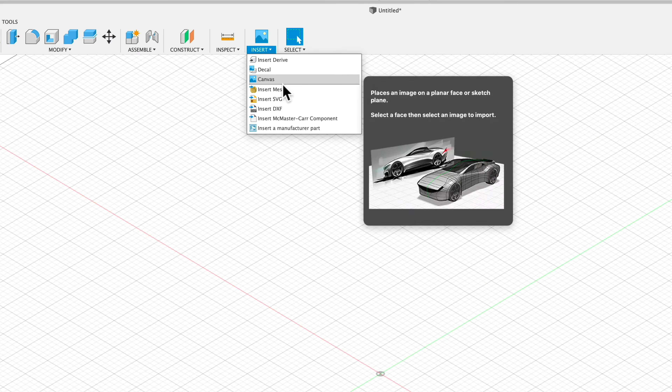All right, so now, like I said, we've got it set to inches over here on the units. I'm going to come up here to insert, go into insert mesh. And then we're going to grab this 3D file, you can hit open, and we're going to bring it in. And then I'm going to hit okay.

All right, so now we've got it imported. So I'm just hitting I for measure, just to double check. It's coming at about 10.5 inches, which is what we are shooting for.

All right, so now we've got our model in here, and we can go directly into the manufacturing workspace. So that's step 1, really easy. Just bring your model in, whatever you want to do. You really don't need to orient it any specific way. All that's going to be taken care of in the next step.

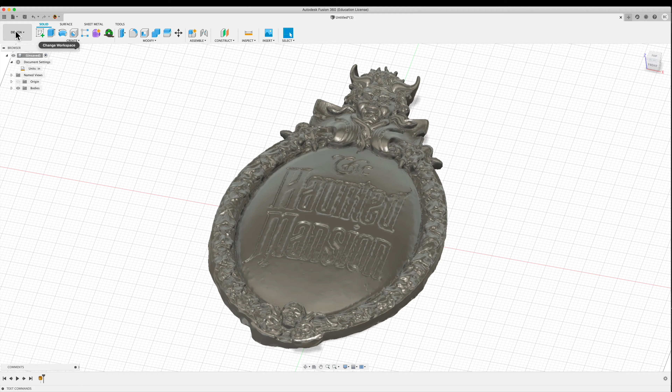So let's actually move to step 2. That's where we create stock and make all of our toolpaths so we can send them to a CNC. We're going to jump out of the design workspace, come up here to the top left, and go into the manufacturing workspace.

This is where we're going to spend the majority of our time. The very first thing we do is create a setup. You can have multiple setups for the part you want to manufacture, and multiple toolpaths within each setup. The setup is where you define your stock, where you have your zero on your machine, as well as some other basic parameters, and then you'll drill into the actual toolpaths.

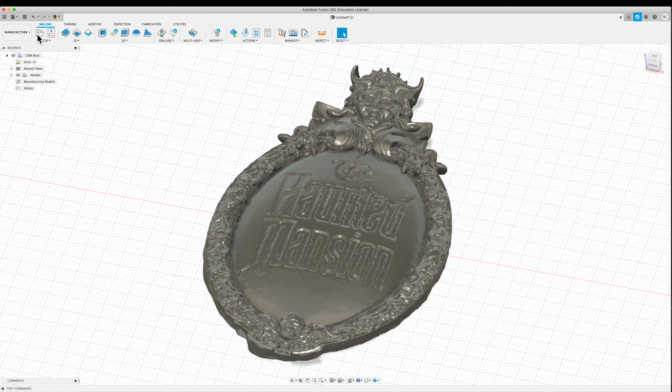It kind of works from left to right for the most part, the process we're going to go through. So come over here to setup, and we're going to open a new setup. You can see setup 1 now pops up. We're not going to select a machine—you can do that if you have one that makes sense for you, but we're not going to worry about it.

We do want it set up for milling. You can see cutting, turning, and additive—that's like 3D printing stuff. Milling is what we want.

But we do want to set up a couple things. First off is our work coordinate system. We're going to use our model orientation because this is actually put on the ground, with the ground as your XY plane. And then our stock box point—we'll get into this in a minute, where the origin is going to be.

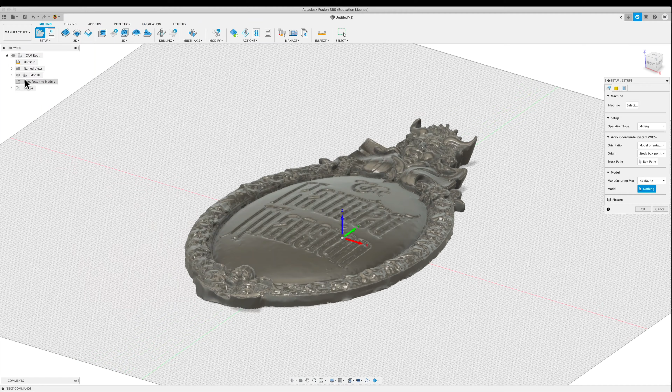I'm going to go ahead and select what the model is. Hit OK, and I'm going to go ahead and save this. I just saved it as the Haunted Mansion example.

Going back into the setup, let's go ahead and set up our stock. You can do your stock relative size to the box, a fixed size to the box, or just a straight up fixed size. In my case, I'm going to do a fixed size box. I know I'm going to be using MDF to do this.

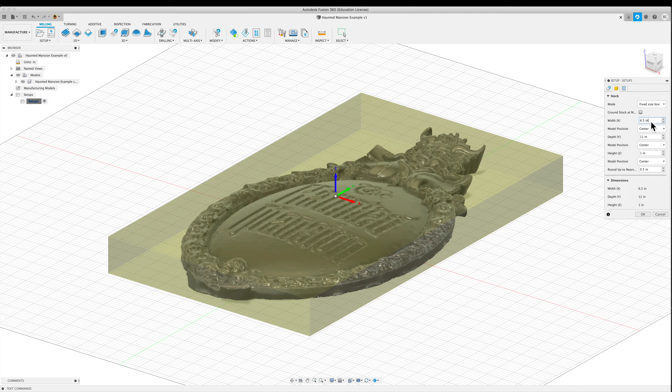So we're going to do a width of 12 inches, a 12 by 12. For the height, we're just going to do 1 inch to make this really simple. Not only can you define the dimensions of the stock, you can define how the model fits within that stock. In this case, I want my model at the very bottom of the stock, so under the height Z, instead of center, I'm going to do offset from the bottom, and define an offset.

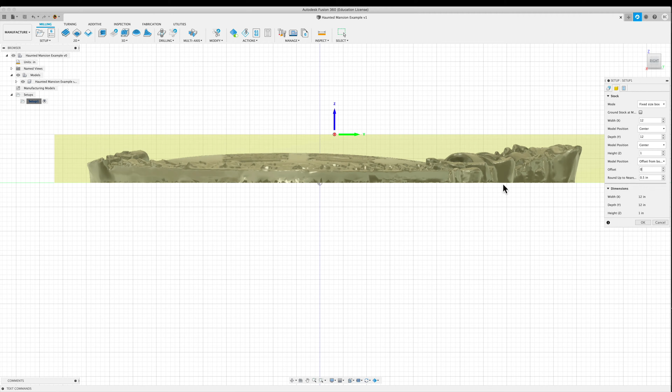It's not going to move what it just did—it's giving us an offset of 0.1, but I actually just want to make that 0. This should move it to the very bottom, or really the stock moved up. So there you can see that if we move it, the stock and the model are at the bottom.

Now I'm going to jump back into the setup. We can go back to our work coordinate system, and I want to do it as a stock box point. You can obviously select it by a point on the model, but more than likely you're going to want to do it as a point from the stock, and in my case I usually do the bottom left if you're looking at it.

So if you're looking at the front—you can see my view cube, I've got it turned to the front—I'm going to select right here as my stock point. We don't have a fixture, and the post process is just like naming stuff, you don't need to worry about that.

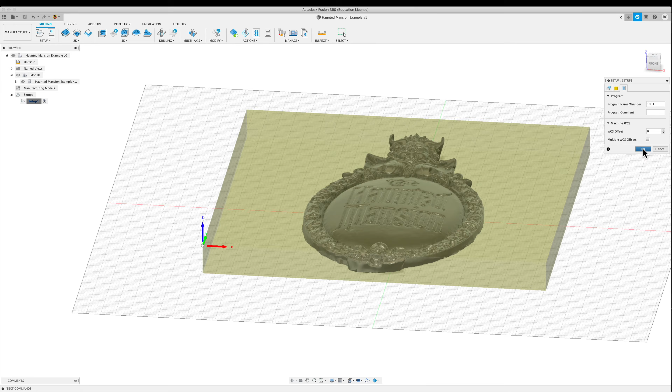All right, so that's everything we need. Hit OK. You'll also see that the stock actually goes away unless I have the setup selected, so if for whatever reason you don't see it, that's just what's going on.

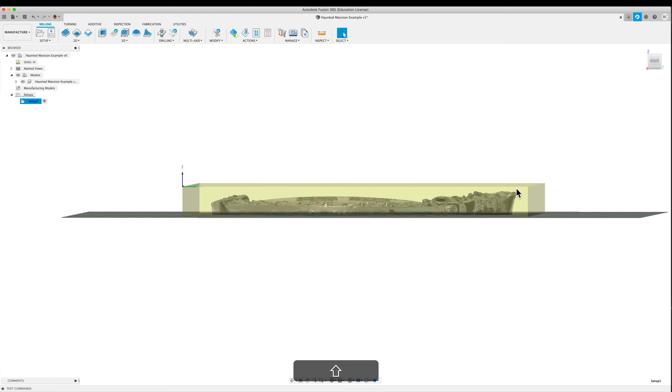All right, so let's talk about how we are actually going to mill this out. I think I'm going to do three different operations. The first one is—if we go to this piece of stock, we have a good bit of material at the top that we're not going to need, so we're going to do a facing operation.

This is also great if for whatever reason your stock isn't perfectly flat. In my case, this is MDF, and the facing operation is just going to take away a lot of material quick, so it speeds up our later tool pass when we're going to need to use a smaller bit.

The next one we're going to do is a 3D adaptive clearing tool path. Usually that's the one I use when I'm doing stuff that's 3D like this. It's going to be a flat end mill, so it's going to take out the majority of the material, but it'll still leave some because it can't get into all the nooks and crannies of this guy.

And then to finish it, sometimes I'll do one or two different passes, but I'm just going to do one for example's sake, and that's going to be a parallel tool path. You can also do scallop or contour, which does a pretty good job, but parallel for the most part is going to work.

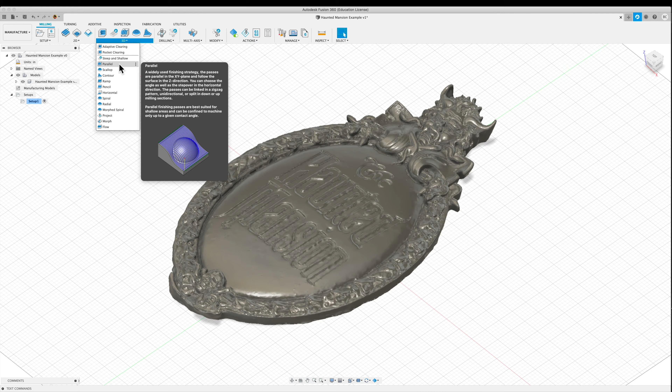What it's going to do is we're going to take a ball nose bit, and it's just going to go back and forth, all the way across this model until we get something fairly smooth. But actually, we're going to do one more tool path, and that is going to be a contour tool path that will go around the edge of the entire model and leave some tabs, and that's going to be how we can take this thing out of our piece of stock.

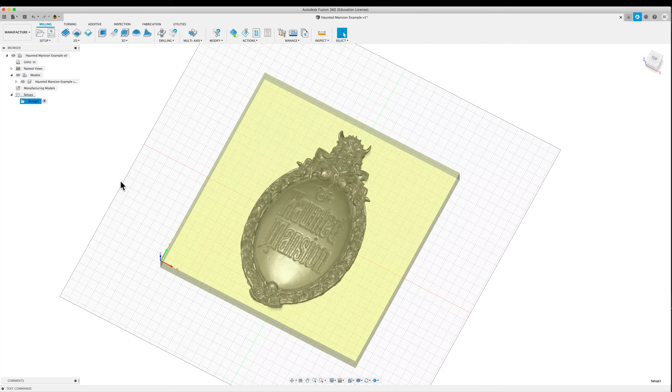So let's actually jump into our first one. That is, again, going to be our facing one, which is this one right here. I'm going to select it, and then we're going to have our options pop up here on the right. I'm going to pull them over so you can see them hopefully a little bit better.

I am not going to get into doing your surface speeds, especially your cutting feed rate. That's really going to depend on your machine, your bit. There's a lot of great resources where you can find how to determine that, but I'm just going to leave this as what it gives me. You're going to need to dial your cutting feed rate in depending on your situation, as well as your ramp and your plunge feed rate.

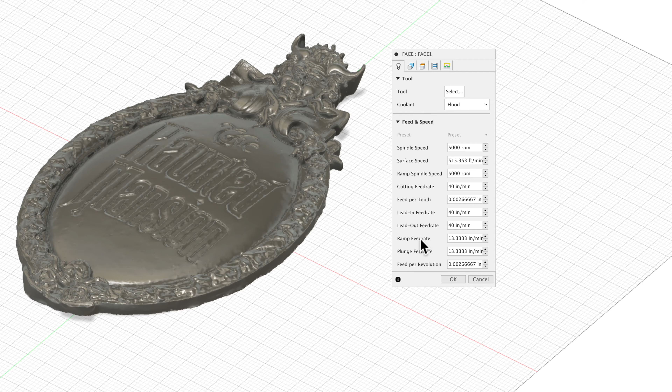But we are going to need to select our tool, so I'm going to come up here to select. I want to do a face mill, so by tool category, milling, and then selecting face mill. We're going to come over here to tutorial inch, and you can see we have a big 2-inch face mill, so we're going to select that. Now you actually see the face mill shows up, kind of the faint outline of the tool itself, and that's really nice because you get a perspective of how big this thing is going to be.

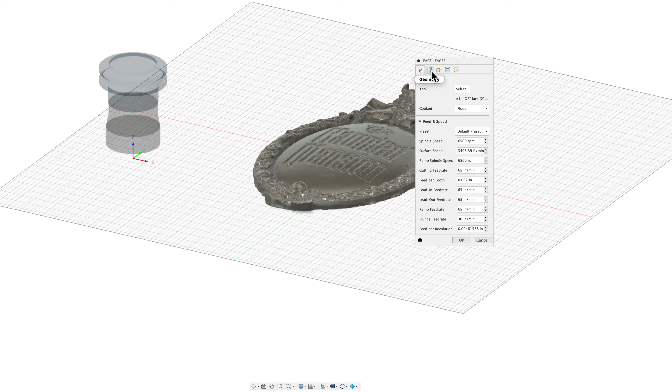So there's a few things that we're going to need to dial in. We've got our tool—change those as needed. Come over here to geometry, and right now it's set to stock contours, and I believe it's set to the setup, so you don't have to do anything here. It already knows the contour of your stock, and so it's going to take that out.

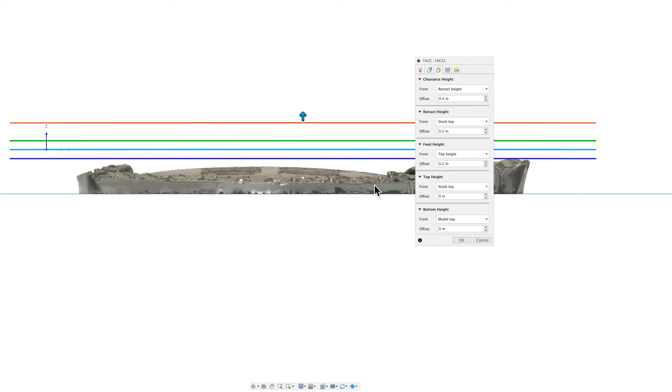Then our heights—this is something you might need to adjust every single time, depending on what you're doing. I'm looking at the right side view, so you can kind of see up and down. I'm going to move it just a little bit so we can get the labels, might be a little bit easier to see what's going on. So you have, let's see, 1, 2, 3, 4—there's 5 different ones that you can change, and all these really are the different heights on your CNC. If you mouse over one and leave it there for a second, there's a drop-down, a cool tooltip that will walk you through what it actually means.

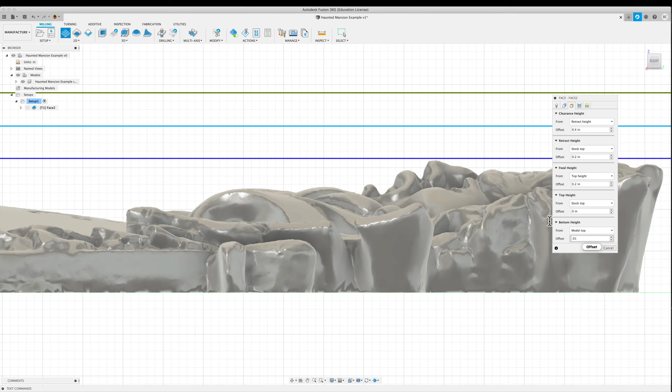Now, the only one we actually need to worry about is our bottom, and as of right now, it is going to the top of our model, which is what we want. But I'm actually going to leave a little bit of a clearance just to give us a little bit extra stock to work with, so I'm going to go 0.01, and you can see that moves it up just a little bit, and everything else is going to be good. You can really dial these in—what those are going to do is help you speed up if you make those clearances or retract height smaller, but in our case, I'm just going to leave them stock to keep it pretty easy.

Coming over to passes, first is the step over. This is how far over the bit moves each pass, so it needs to be less than the diameter of the bit. The tooltip gives a good rule of thumb: for a flat tool, it's the diameter times 95%, so in this case 2 inches times 95% gives us around 1.9.

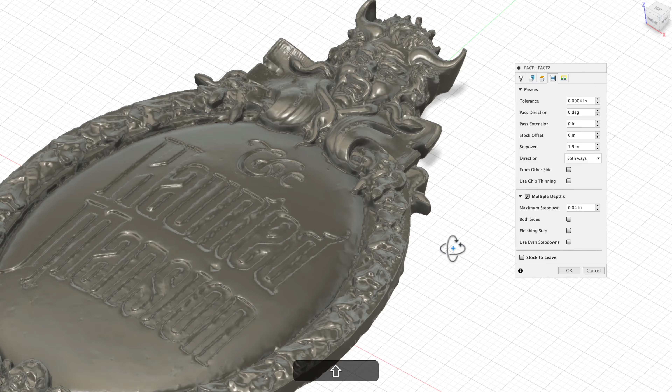Which will work fine. Then multiple depths - this depends on your machine. You might need multiple depths depending on how much you're cutting. I'm actually going to do that, just having it come down, even though it probably would be fine. A rule of thumb is to take your diameter divided by 2, and that's really your max depth - in this case about 1 inch, but that's pretty crazy. So let's just go down like 1/4 of an inch and see how that goes.

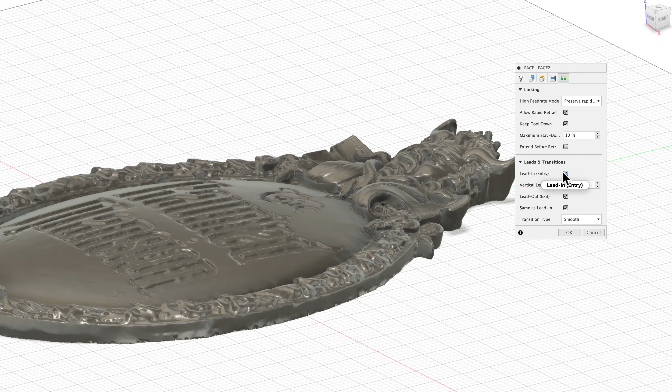Everything else, linking - really what these are doing is helping you optimize what the CNC is going to do. All right, hit OK.

So you saw it calculating, and now it turned green. That green is actually showing you your stock. This isn't like the setup stock, like the yellow, but the actual stock that can be cut away. I have this option turned on, called automatic in-process stock generation, so you can actually see what this is going to look like.

I'm going to turn this off in a minute because the calculations will take a while, but so we can see what's happening, you can right click right here and go to simulate, or up here, same thing, hit simulate. You can see this has turned solid. Just in case yours looks different, I have my tool turned on, my tool path turned on set to tail, and my stock turned on set to be plastic vinyl.

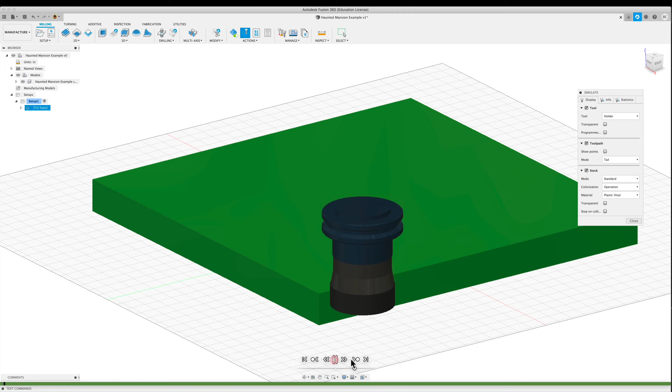What this does, if I hit play, is you can actually see it cutting away. Now this is really cool. I'm just speeding this up.

A couple things also to note: there is this green bar at the very bottom that will change colors. If it's red, that means an error has happened - more than likely the CNC has hit something. You can actually set it to stop on collision, which is right here. That's a really good thing to have checked just to make sure you're not going to break anything, because then you can go back and fix it.

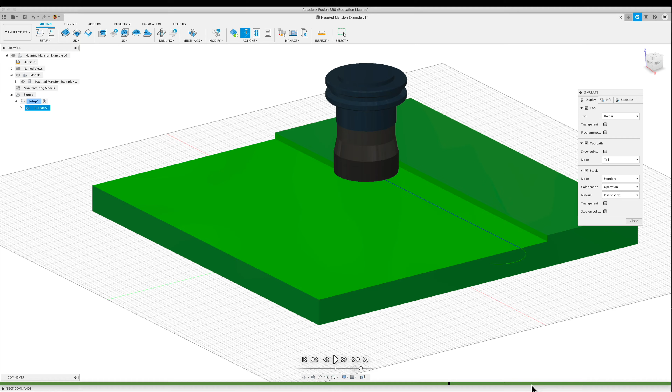As we get more toolpaths, you'll see those toolpaths color-coded as well. I'm going to go ahead and go to the end of this, and you can see that's what our stock looks like. If we select our model, you won't be able to see our model, but our model is in there and everything looks good. I'm going to hit close, and it's showing us the stock at the end of the operation. You can see if I go into simulate again that goes up, but I'm going to close out of it. So that's at the end of that operation.

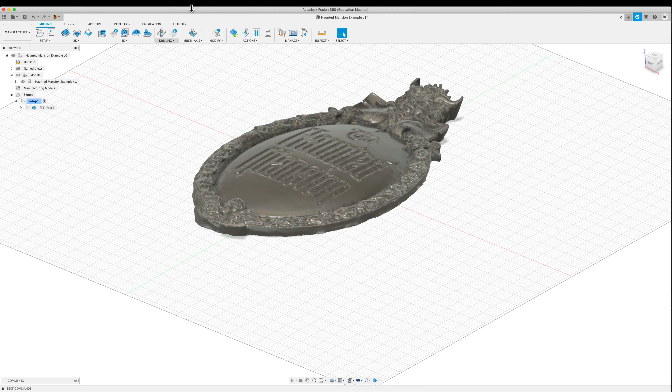All right, next up, we've got our facing operation. Now we are going to do our 3D adaptive - again this is going to take out the majority of the material. I'm going to be using a 1/4 inch bit to do this, and then I'll come back and really clean that up with a parallel toolpath. So we'll come up here to 3D adaptive clearing.

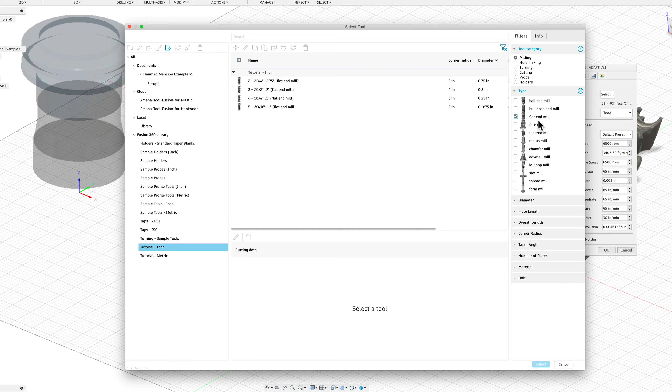It automatically selects whatever bit you had before, but obviously we're not going to do that because that is massive. Instead, we are going to stick with our tutorial tools. I'm going to do milling - you could just search for them right here, but I'm going to use this guy because I'm not sure what they have. I'm going to use an end mill, and then a 1/4 inch end mill. I'm going to hit select. I'm going to leave these all default, but you can change them as needed.

We're going to come over here to geometry. A few things that we want to change: right now, if we left our geometry as none, then it's going to machine the entire thing, removing everything else. So this is going to take out any material that isn't the model - it would literally cut to the very bottom of your stock.

It would actually cut all the stock away. We don't want to do that because we are going to be using a contour toolpath at the very end to remove it, so we can speed this up.

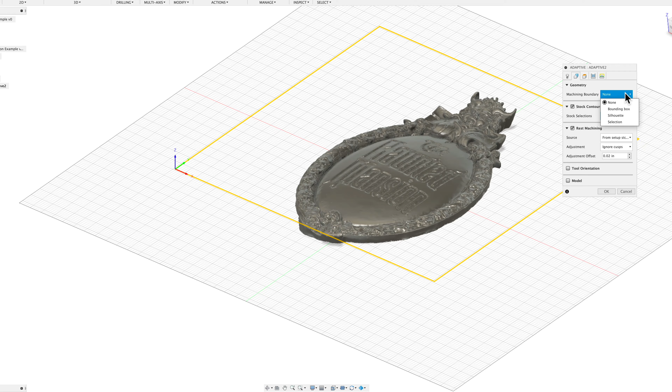Instead, what I want to do is select silhouette. You can see that the silhouette is just what it sounds like, it's the silhouette of your model. So I'm going to select that, and now it's only going to cut, let me go to the top, what the silhouette is inside of.

I am going to set my tool containment to be outside, and then give it a little bit of an offset. I'm actually going to go out a good bit, about 1/4 inch, and that's to give me some space for the next operation so the bit can get in there before it really has to drill down.

Then we're going to leave rest machining on, and all this does is remove the remaining stock. So if the toolpath before didn't remove everything we wanted, if we're coming in with a smaller bit, it will. I'm just going to leave that on. Because it's a facing operation we shouldn't run into that, but we'll leave it on anyway.

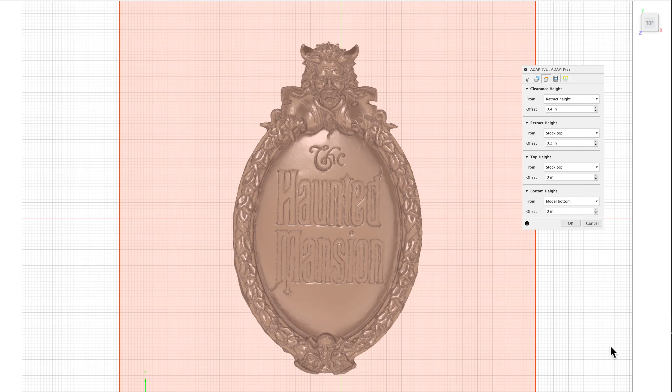And then we are going to select our model, what we actually want to cut. So we've got our model surfaces, and then coming over to the heights, we are going to do this as well.

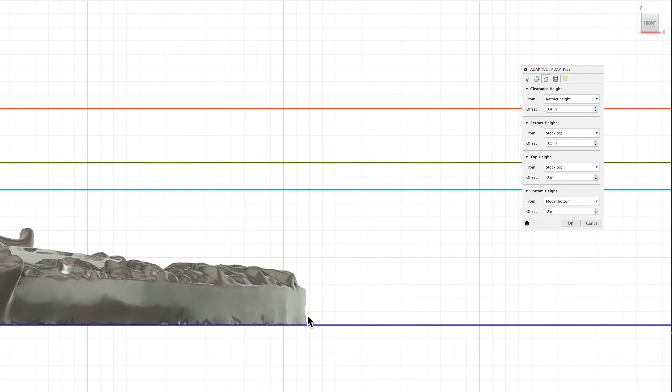This isn't going to be an exact copy of this model. We aren't doing a true 3D cut, we're really doing 2.5. You can see there it comes in just a little bit, we're not going to be able to cut that, which I'm okay with. Especially around the horns on this guy it definitely cuts back in, so it really is just going to go straight down, but that's okay for my situation.

The only thing I'm going to do on this is adjust our top height to be the top of our model, since we've done that clearing operation before. Actually, we'll go up just a little bit, 0.02, because I think before we did 0.01. And the bottom we'll leave at 0, that's fine because we'll still clear that out later.

And then our passes, you might want to change your optimal load. This will be dependent on your machine and what bit you're using. We're not going to adjust that. I am going to leave some stock to leave, about 0.02. All these settings, it just brings in automatically, so really I don't change a ton.

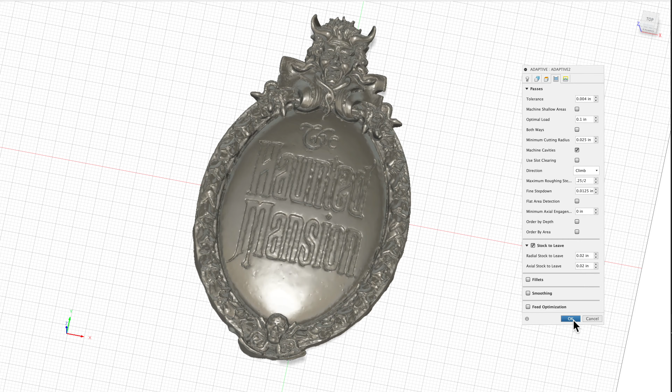One thing you do want to make sure of is this maximum roughing step down. That's where I usually take the diameter of my bit divided by 2, and usually go with a little bit less than that. In this case, we're going to go 0.25, divided by 2, and then it calculates the fine step down from that. The linking, again, I'm not going to mess with.

All right, hit OK, it's going to take a minute to calculate everything. So the toolpath is done and it looks like a hot mess, that's why I usually leave this turned off.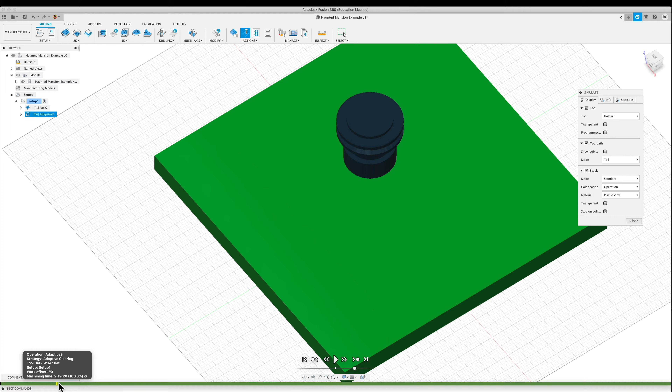Now so we can actually see this work, I'm going to come over here to simulate. Again, I'm double checking to make sure there's no red so it doesn't break anything. And then what I like to do is simulate all the toolpaths, so I'll come up to the actual setup, not the individual toolpath, and go to simulate.

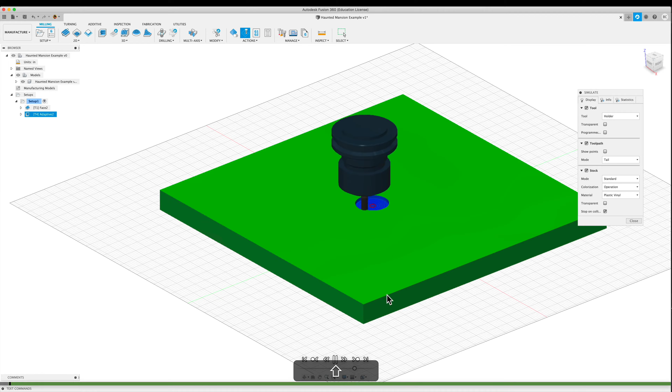I'll use this one, this will run to the end of that toolpath, and then I'll start this one. Sometimes it doesn't do the previous toolpath, so I do that just in case. And then I'm going to speed this up so you can see what's going on.

It's also color-coded, the actual toolpath. So the green one, that was our facing, and obviously blue is what it's doing right now, slowly leaving this guy. I'm going to pause it and take it all the way to the end. This does turn red, but really the red at the bottom just means it's calculating, so we're going to wait, I believe that's at the very end.

We'll get there. Also, you can see this shaded area has two different grays. The shaded one is the facing operation, and if I hover over it, it tells me what operation it is, and then the adaptive, and then this is just the amount of time.

So you can see that the majority of the time is going to be spent doing our adaptive clearing. And if we do want to see the time, come up here to stats, and you can see that the machining time as of right now is 2.5 hours to cut both of those. So quite a bit of time to get this thing cut out.

All right, so now that we've got that one done, our next step is to move on to the parallel toolpath to really clean this model up and get it more into our finished state, so we can dial in what we've already done and get even closer to the model. This is going to be pretty much my finishing toolpath. You could do multiple ones of these if you wanted, but in this case, I'm just going to do one.

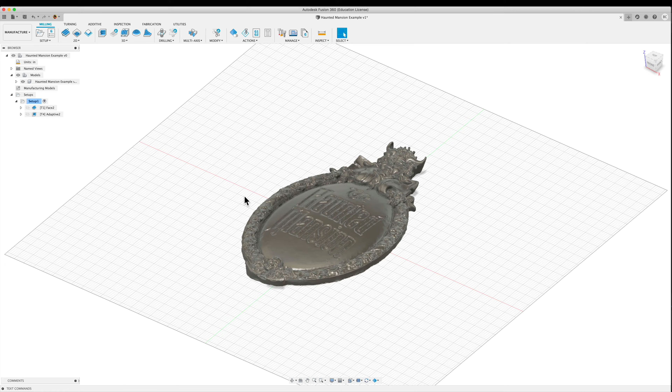All right, so I'm coming up here to 3D, going down to parallel. Then I'm going to go with this ball end mill, the 0.075. Again, I'm going to leave all of these the same. Then coming over to our geometry.

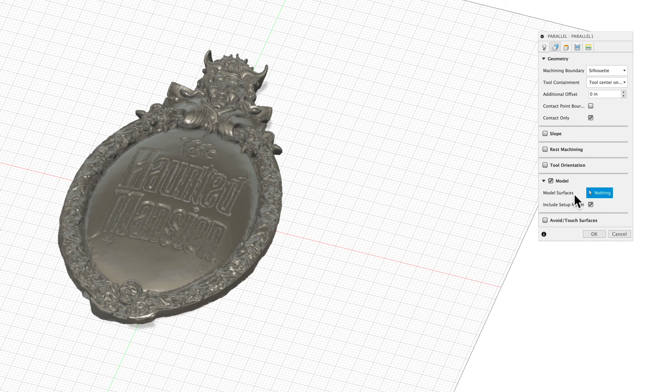Again, we're going to do silhouette. It's going to be tool center on boundary, and we're not going to do an offset now, so this one should be fine. I'm going to make sure I have my model turned on, and we are going to do this guy.

Then our heights. Again, we'll have all that pretty much good to go, except we're going to do this from the model top. This really doesn't matter, but we're going to do it anyway.

And then the passes. All right, so the step over, this is where you're really going to define how high quality the finish is. So for us, I'm gonna actually just do a 0.05, and you can definitely get it a lot further down if you want, but I'm going to do 0.05 and kind of see what that looks like.

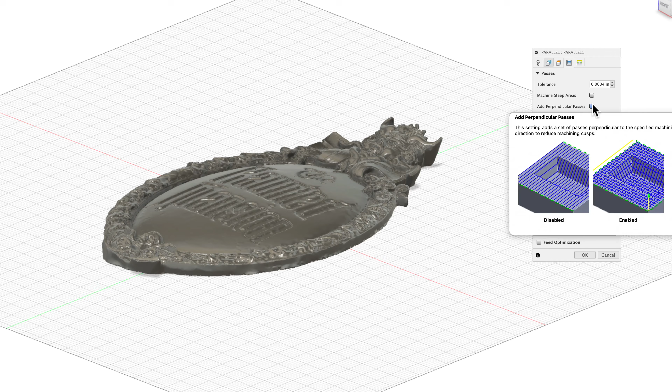Also, you can have it go in different directions. So you can go perpendicular, as well as set an angle if you wanted to. And then you can also have it come back the other direction as well. If you even wanted to dial in more, you could do perpendicular passes, so it's going to basically do a grid going one way, then the other, but that's going to pretty much double your time. So that will be a good bit longer.

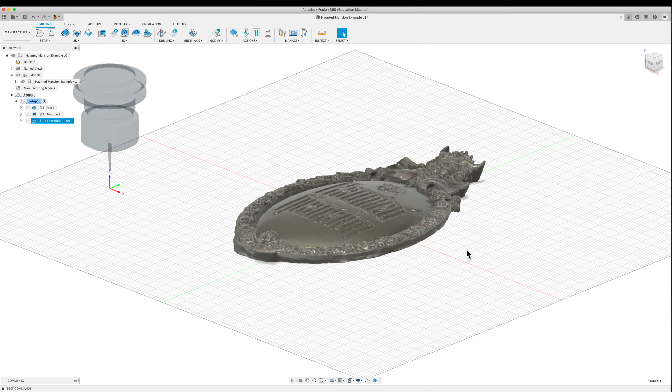And I'm going to hit OK. And it's going to take it a while to calculate. All right, so that is done.

We're going to go ahead and run all of these to kind of see what our finished part will look like. So I'm going to go ahead and skip to the parallel toolpath. All right, and now I'm going to run it, and you can see it is going slowly back and forth.

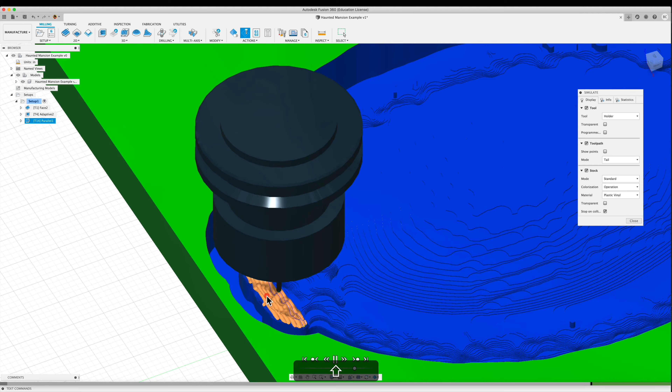And so it's still going to be pretty scalloped at that, was it 0.05? So I am definitely going to dial that in some more, but just wanted to give you kind of a look on how this actually works.

All right, so we can see that it actually is giving us an error. I believe it is hitting, so that is because the bit needs to go deeper. So one thing that is actually going on is it is trying to go all the way to the bottom. Remember, we set our bottom height to the bottom of the model. Really what I could do is have that higher than the bottom, because this is actually going to cut it out on the previous adaptive step.

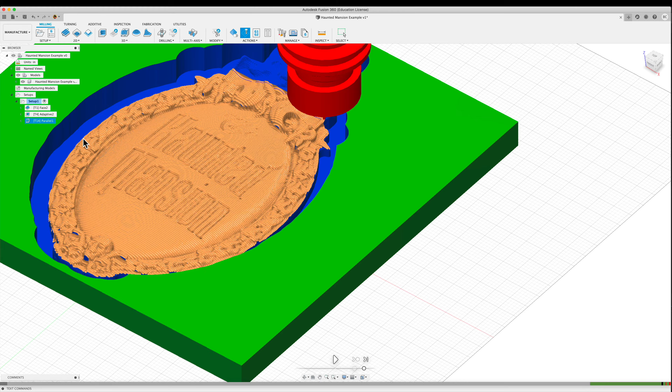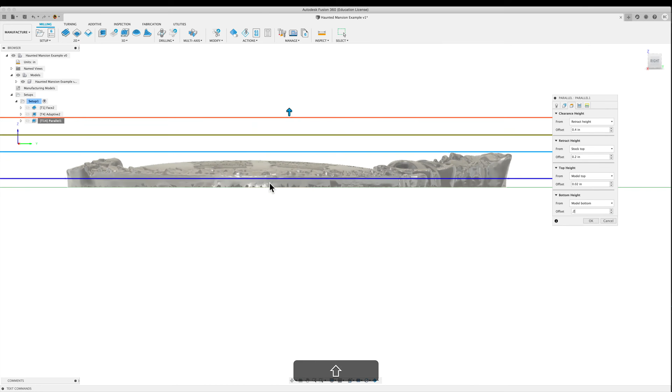So I'm going to go into here, and I'm actually going to edit this parallel toolpath, and I'm going to set my height to... we're going to do an offset from the bottom. So let's come up maybe 1/4 of an inch. Really, because that angle is not going to be able to cut anyway, so let's go actually 0.2, so it gets over just a little bit of the side, and then we should be good.

And then also I'm going to increase my step over. I'm going to go 0.01. Actually, I'm going to go 0.02, so this is going to double it and see what this looks like. And there you can see, so now it's not going all the way down. So I'm going to do the same thing for the adaptive. I'm going to right click, hit edit, then come over here to the heights, and then for the model bottom, we're going to go 0.2.

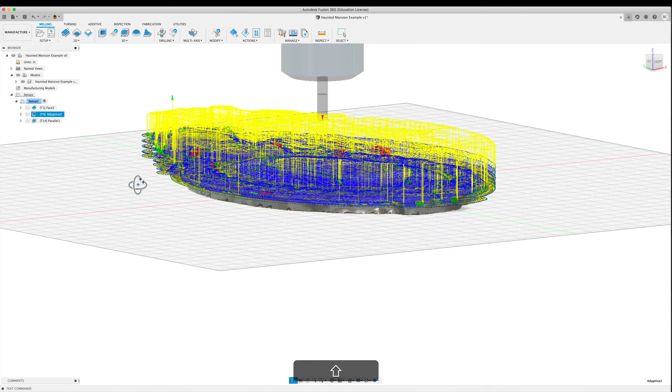So now it shouldn't be going all the way down. We just updated that adaptive toolpath, and now you can see it's only going down to right here, so it's not going to cut the part completely out. Same thing with the parallel toolpath, it's not going all the way down.

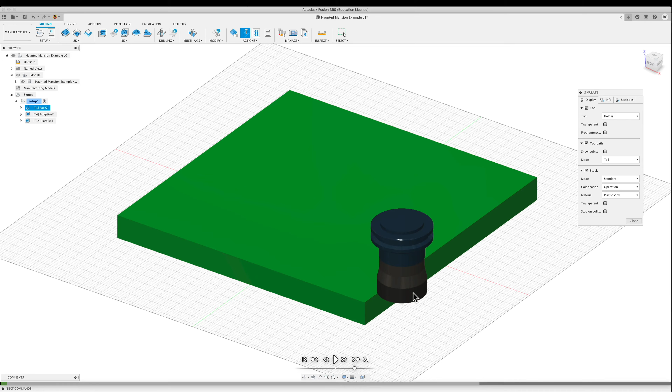We're going to go ahead and simulate all this and make sure everything is looking good. I'm actually going to turn the collision off because I think the parallel is going to hit, just because the bit isn't super long. In real life I'd be using a longer bit, so I shouldn't be hitting anything, but I'm turning that off so we can get to the very end and see how this is going.

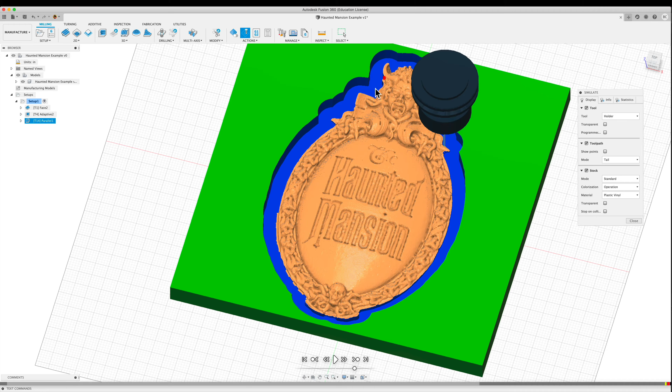All right, so that is our part that has been milled out for the most part. Our final step is to do a contour to cut this piece out. So we've got one toolpath left, and that is to cut out the contour all the way around this plaque so we can get it out of the piece of stock.

Normally your shape is probably going to be pretty simple, so you might have like a circle or an oval plaque, or even something square, maybe like a flag that you're carving out, and then you can select the geometry directly. Now if you remember, because this was a mesh, we didn't convert this into a body, so in terms of Fusion 360, that means it doesn't actually know where the edges are in the program.

So if I come in here and do a contour toolpath, I'm going to come over here to 2D, over to 2D contour. Again, I'm going to select my tool as a 1/4 inch flat end mill.

Then coming over to geometry, normally you would select a contour. So if this was something that we made, I'd be able to go in and select those edges, and especially if this was just like a circle or a square, I could either select it from the sketch that we initially made it from, or directly from the model. But because it's a mesh, we can't do that.

And because this is a mesh that, I mean, it's not super complicated, but it definitely has lots of different elements going all the way around it, this is the way that I have found works usually the easiest for me. This is actually to take a picture of this, bring it into another program to get the outline. Again, you don't have to do this, you could just draw an oval around this and clean it up afterwards, but I want to show you the full process on what I did.

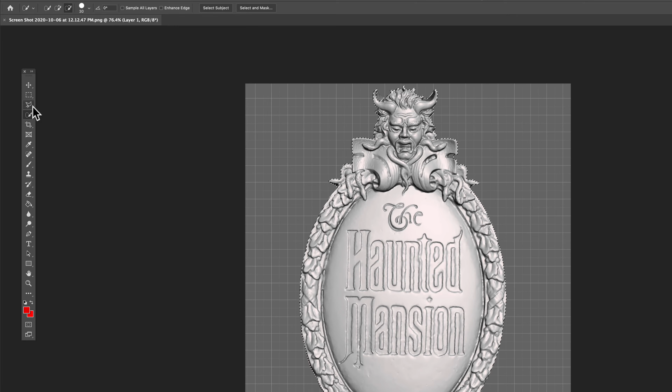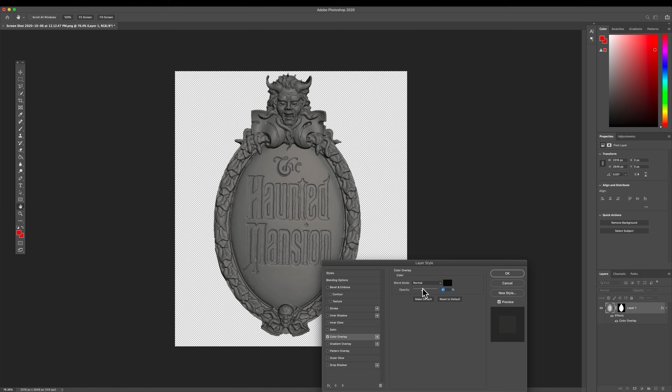They have a select subject option, so you can see it does a pretty good job selecting the subject, and then I'm going to use that because I'm actually going to mask everything else out. Now with that masked, I'm going to do a color overlay, because what I'm trying to do is just get this as a solid color. We're going to set this to normal, not multiply, and make it black, and then turn the opacity all the way up. All right, so now we have a solid black, basically a silhouette.

There might be a way to do this in Fusion, because we were using that silhouette option when we were doing the 3D adaptive, but I can't find it for the contour. So instead, I'm doing it in Photoshop, and I'm going to save this as a high resolution JPEG. Now I actually want to get a vector file out of this, so you can import an SVG directly into Fusion, and I'm going to do that inside of Illustrator. Again, you could use free vector editing software where you don't have to pay a monthly fee, but in my case I've got Adobe, so that's what I'm going with.

So I've got this imported into Illustrator, then I'm going to come up here and do an image trace, and then do a black and white logo. Everything looks good. I'm going to hit expand, and then ungroup everything with the keyboard shortcut.

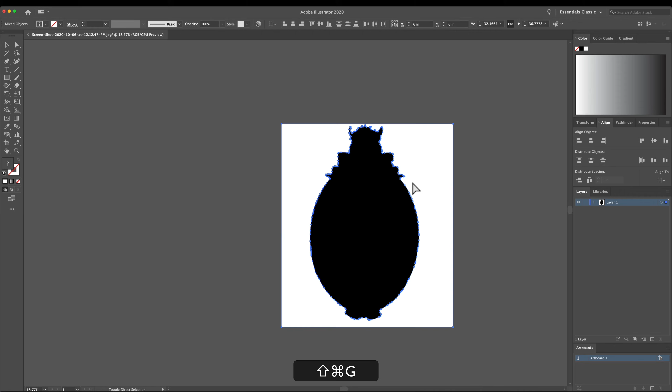So I should be able to delete that white. And there we go. I think the artboard is super tiny, so let me make the artboard a little bit bigger so it actually fits. Now we actually have a vector of this guy.

So I'm going to come here and go File, Save As, and this is going to be saved as an SVG. I'll just call this Outline.

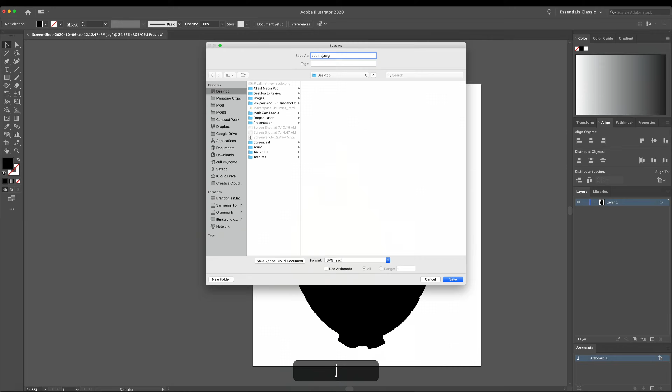Now going back into Fusion, I'm going to cancel out of the 2D contour, then go back to the design because we're going to add a new sketch. To do that, I'm just going to go Insert, and then insert an SVG. The units might get a little bit wonky.

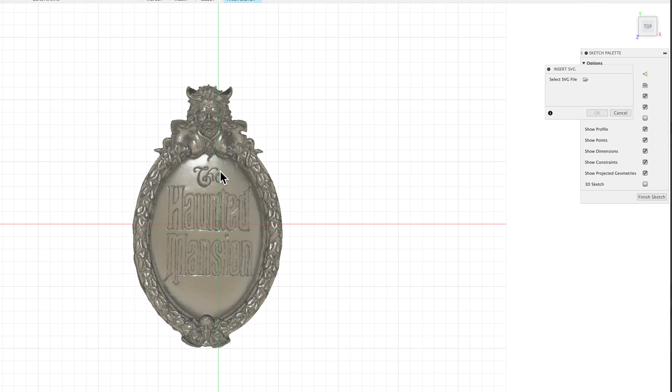All right, so there is my SVG. I'm going to import it, open it up, and there you can see that it gives me that outline all the way around it. Now the units are off.

So what I'm going to do is actually scale this thing. Let's go by half, and then I'm going to have to dial this in. Depending on how you're doing the units, you probably won't have to do something kind of like this, but I'm not trying to get it super exact. I'm just trying to get something fairly close to where I'll be able to cut this out. All right, so now we've got a new sketch in there that should have our SVG on it.

So if I turn the body off, you can see that underneath. Now this isn't exact — I probably should have taken the screenshot from Fusion. I think it had some warping just because of the perspective this was in, but this is going to work fine for what I'm trying to do.

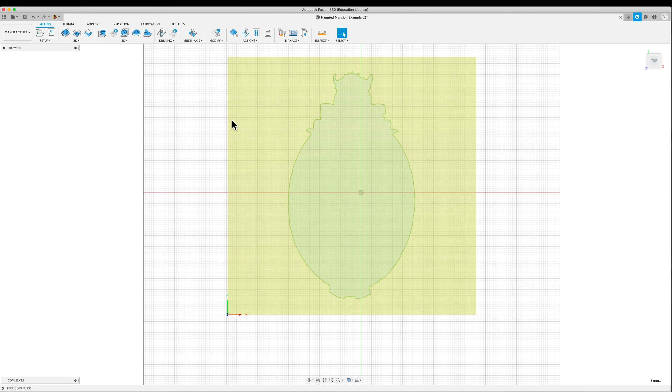So now I'm going to jump back over into the manufacturing workspace, and now you can see that we've got that sketch there, as well as if I turn my body back on.

So now if we go in and actually make a contour toolpath, come up to 2D contour, again selecting the quarter inch flat end mill. Again, all this stuff you're going to need to adjust as needed. But then for the geometry, now we can actually select some contour.

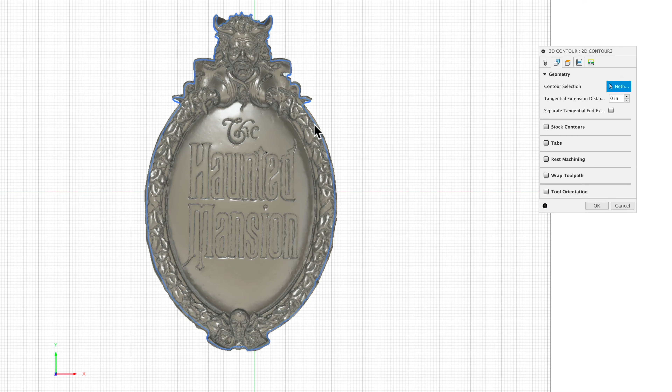So you can see that it is back there. Again, it isn't exact — it's actually going to cut in a little bit more than what the thing is, but for what I'm doing, it's going to do all right.

And now I'm going to go in and set up my tabs. You can actually do it by position, or you can do it by distance. I usually do it by position so I can actually dial them in. You can see that little dot, and then I'm going to go ahead and select where those tabs are going to go.

I'm just going to do four. Let's see, I might actually do a couple by the horn so they don't break. And you can see when I'm putting them in, it's actually doing them on the inside. You can kind of see that tab right there. Let me turn the model off so you can see it.

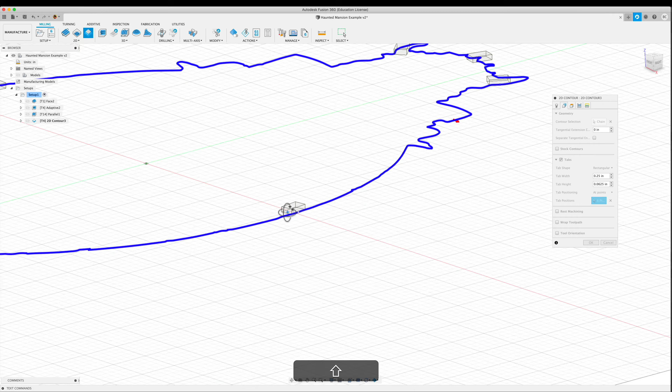And so that's because it's actually going the wrong direction. So this arrow, I'm going to click it — I'm going to click that arrow. That's going to switch the direction, and now you can see that shifted to the outside. So then we know that's going to be going in the right direction around the contour.

And then, let's see, I think everything else looks good. We are going to want to do multiple depths. So again, the maximum roughing step down, that's going to be our diameter divided by 2.

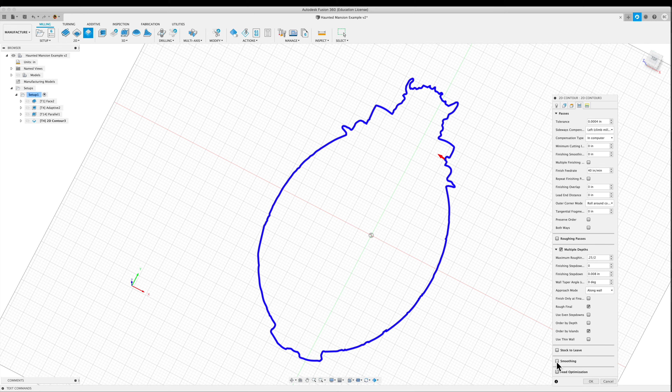And then also if I wanted to make this thicker, so if I didn't want it to go just around one time, you can do multiple roughing passes if you want it to be wider than just the width of the bit. But I'm just going to leave it as the width of the bit to make it simple, and then hit OK. All right, and then if we come in and take a look at this, everything is looking good.

One thing I actually forgot was the height. So the only thing I'm going to change on the height is I'm going to make it go down just a little bit. I did 0.005 from the model bottom, negative, so it's going down just a little bit to make sure I cut through the entire thing.

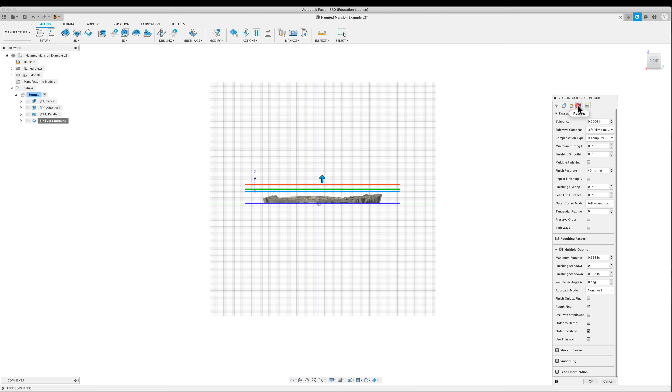Then everything else looks good. We're gonna hit OK, and we're gonna generate that toolpath. And then I'm doing it from the stock top. Just double check if it goes over into what we haven't cut, that it's still taking its time and getting down there.

So we can see everything looks good. If I run just this guy, even though it's already cut stuff before, you can see it's going to be a pretty simple toolpath. It's going to go all the way through. And then actually I am going to get an error right here, and that is because this stock bit is actually not long enough. But the bit I'm going to be using in real life actually is longer than this guy, so we're going to be fine with that.

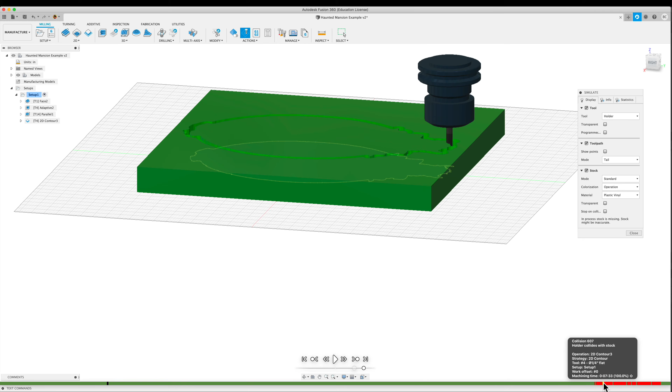But be sure, this is what all of these errors are - this thing is colliding with the stock because the bit isn't long enough. So you just want to make sure you're using a bit that can definitely make the entire way through.

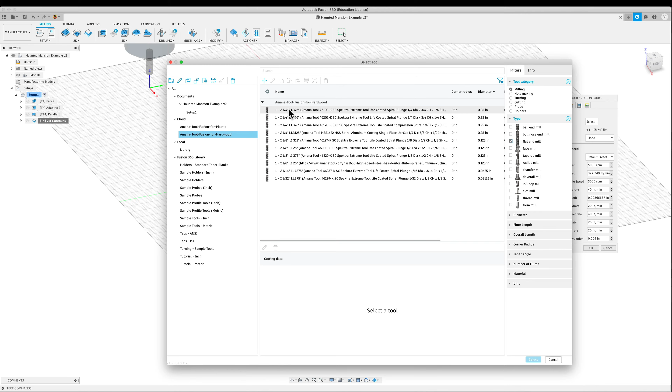And I'll tell you what, we'll go ahead and actually change this up, and we'll go ahead and change what bit I'm using. I have this Amana tool library in here, and then I'm going to be using a 1/4 inch bit that should be fairly long.

And let's see if this one can go the whole way through, and then come up to simulate. And yes, it looks like it's going to go the whole way through, and we are going to be good.

All right, and then you can see the tabs are in there. Everything looks fine. Also, it's nice, it's going to give you this error.

So I just ran that toolpath. I didn't run the things that happened before, so you can see in process stock is missing, stock might be inaccurate. That is because I just ran this toolpath, and that's because the adaptive and the parallel take a long time to calculate. So I just kind of want to skip over to make sure this one was fine.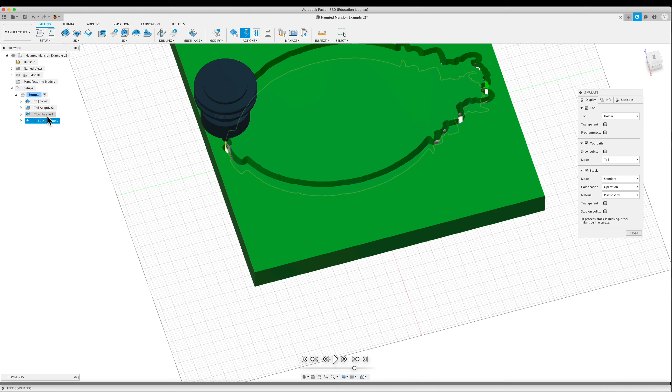But now I am going to run everything. It's going to take it a few minutes to get the full model done, but let's do that real quick. And then I'm going to take this to the very end, and we're going to see what this actually looks like.

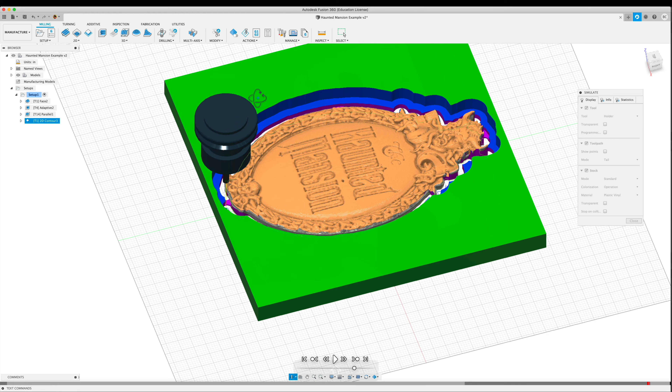All right, so the simulation is complete, and you can see all of our different layers are done and everything's color coded. So the green again is our facing. Then the blue, which you can't really see now, was our adaptive clearing. And then this like peachy color is our parallel. And then it's coming back with that purple, which you can kind of see with the tabs coming in.

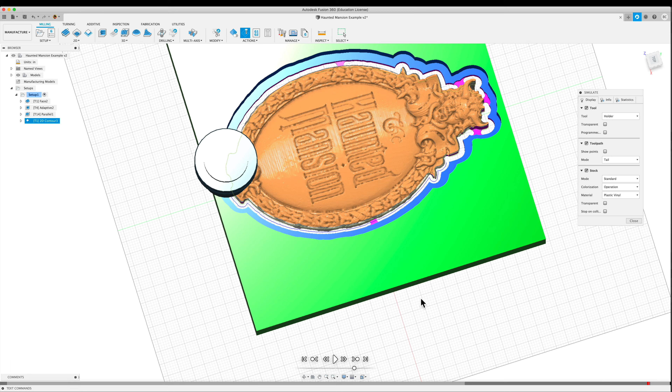So the only error we're getting is on the parallel toolpath, and that's because the bit is actually not quite long enough and it's colliding as it's coming through. So in real life, the bit I'm actually going to be using is longer, and even the material I'm going to be cutting out is going to be thinner, so it's only going to be 1/4 of an inch. But for this example, I just wanted to use an inch to make it pretty simple for you guys.

So once you feel good about all this, there's a couple things you can do. First is you can actually right-click the stock, and then you can go to Stock, Save Stock. And what's nice is it's actually going to save this as a model. So if I go back over to the design...

We're going to do that real quick. I'm just going to import it, and it saves it as a mesh, it saves it as an STL. And this file is pretty big. All right, so I had to bring it in as millimeters. Actually, I dropped it too high, but you can see what this looks like.

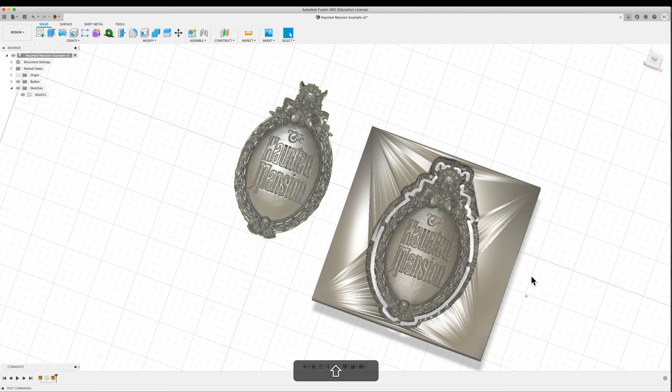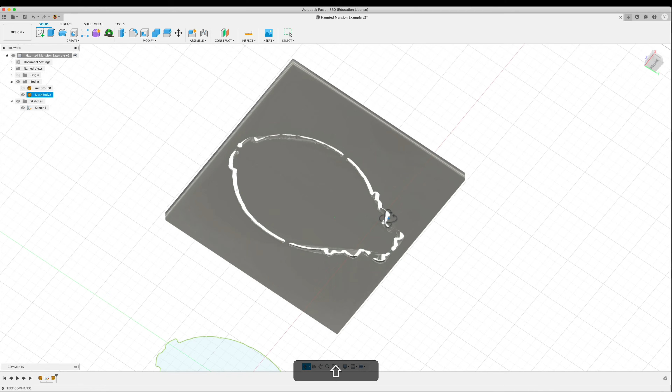And what's nice, if I turn this guy off, if we zoom into this, obviously you can see the tabs, but what's great is you can actually see those toolpaths. So you can get a really good idea of what your final piece is going to look like. And then you could bring that into the rendering environment, and you can do a bunch of other stuff to it like you normally would with a model. But that is a pretty cool feature where you can actually see what your part potentially is gonna look like once you're done.

But I am actually going to back out of that and jump back into the manufacturing environment. So now that we actually have all of our toolpaths done, we're gonna move on to step 3. So step 3 is actually exporting these toolpaths and bringing them into whatever software is actually going to run your CNC, so CNC controller. To do that, what I typically do is if you right click these, you can go down to post process.

So it's going to open up this post processor, and all this is going to do is export out your G code.

So I typically don't really change this up. You will need to make sure and bring in whatever your post processor is. In my case, this is Easel, and you can install those kind of like you can install the tool libraries. Most of the CNC manufacturers have a post processor that you can use, and really it just formats it in the way that your CNC is going to want to read it.

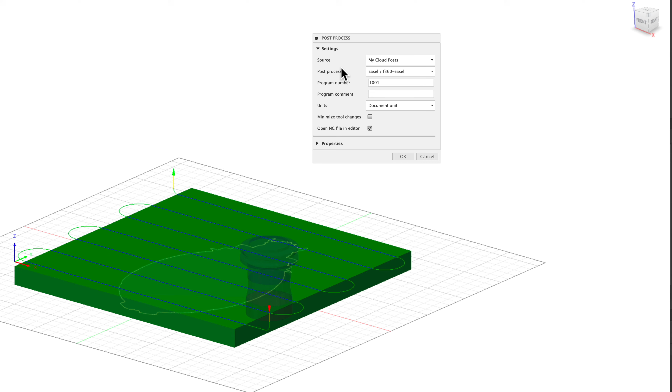So I'm going to go ahead and hit OK. We're going to do this on the desktop. I'm going to save all these real quick, and you can see it pops up, and literally this is just the G code. So there are some of your initial movements, and then there are all of the movements back and forth. So we're going to do the same thing for the rest of these real quick.

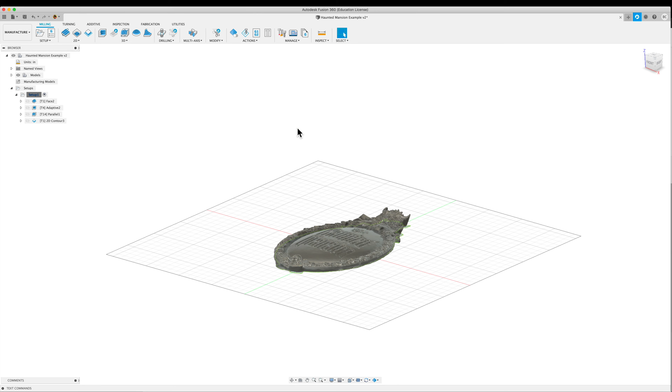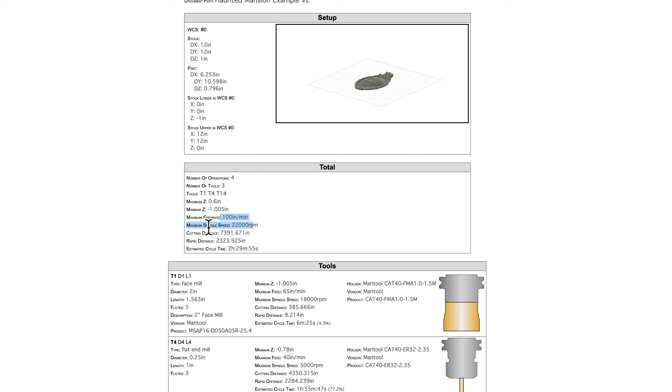And then another cool thing you can actually do is you can make a setup sheet. So I'm going to go ahead and hit open to that. And it is going to save a setup sheet and an example for you that basically has your model, the positioning of it, the number of operations, the number of tools. We've got 3, the maximum feed rates. Again, you need to change all that, the distances and the time. So there you can see it's nearly 2.5 hours. And then you have what each of your tools are and how they're going to be installed, all that kind of stuff. So really that is if you're doing some really heavy duty CNC stuff, this is really helpful.

All right, now we are going to send this to the CNC. And to do that, you're going to have to go through your CNC software. For my case, I've got an X-Carve, and so I'm going to show you how to do this through Easel. But if your software allows you to import G-code directly, you're going to be good to go. So even like Universal G-code Sender, which a lot of people use for DIY stuff, we can use that as well, really easy. So I've just made a new project.

I'm going to call this Haunted Mansion 2 because I've done this once. And then with the way that Easel does it, you kind of set up different pages for different toolpaths. So I'm going to do 4 of these. Then I'm coming up here to File, Import G-code, then import that G-code. It's going to validate it, and then you can still see it and how it's going to look.

It's not going to give you any of the time stuff it normally does because it's just G-code directly. It's also not really going to give you the bit stuff, so you just need to make sure you know that. But so I'm going to do this for all of these. So there is our adaptive clearing.

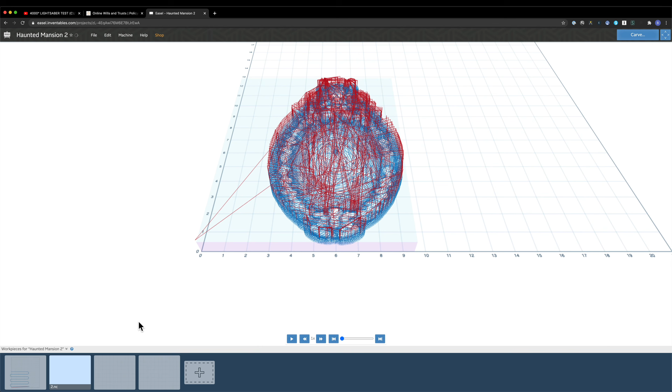There's our parallel toolpath, which that one's actually pretty cool because you can pretty much see the model because it is so fine. And then our 2D contour to cut the entire everything out. And again, because I have placed my origin down here, that's what everything is referencing off of.

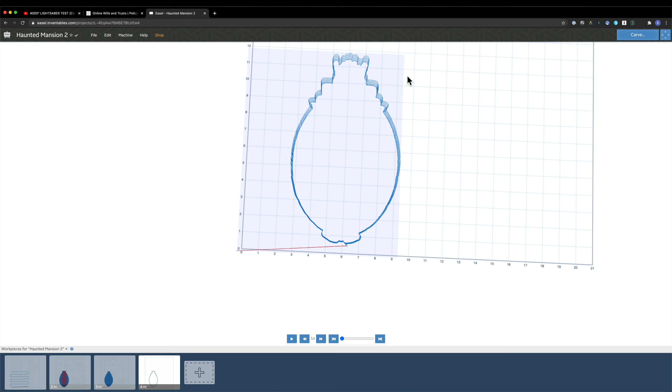Actually, a lot of times I will keep my origin right here in the middle. And so then I will zero everything out from the middle. That works pretty well. But you'll just need to make sure you're using the right size stock if you're going to do something kind of like this. I think we did 12 by 12 inches. You'll want to make sure everything's zeroed correctly when you put it on.

And so from this point, then you just send it to your CNC. So I've actually done this project already in a previous video. You can check it out up there. So Fusion really can take you from the very beginning, importing your model or creating your model, to creating all the toolpaths, to exporting all your G-code, to actually bringing it into your software and then running the CNC.

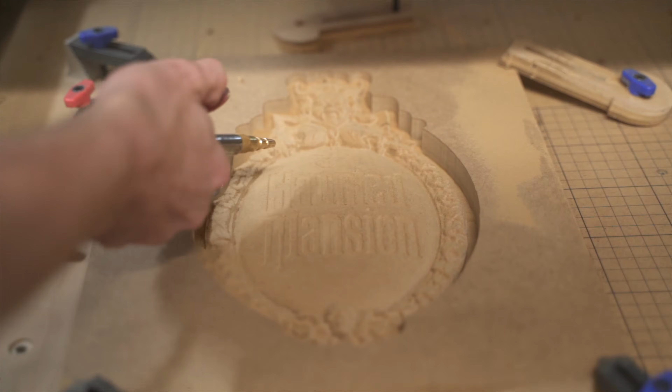I find it's super helpful for doing anything that is 2.5D or 3D. You can do two-sided stuff. You can get super complicated. I've even done guitars with this. It's pretty crazy what you can do inside of Fusion.